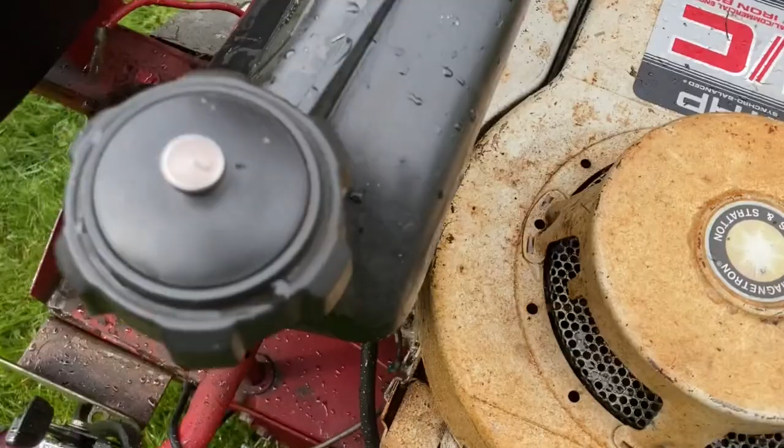Okay, well, it's cleaned up pretty good. Got a lot of grease and oil off. Up underneath here, not too bad. Not perfect, but that's fine. Makes it a lot easier to work on.

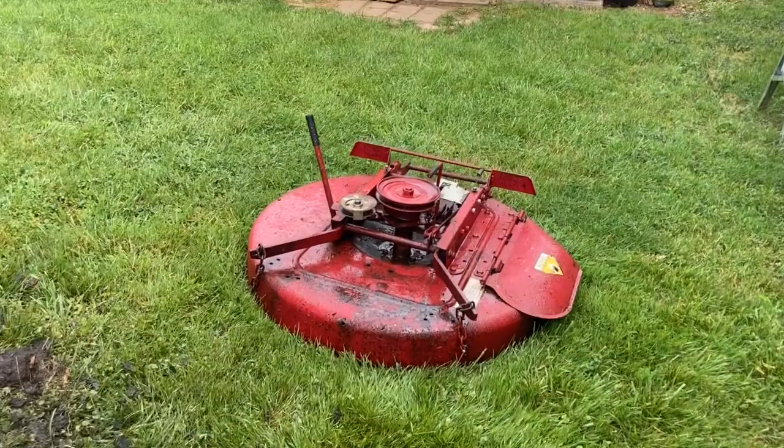Didn't hit the front too hard. I didn't want to lose the stickers. So, the deck could have come out a little bit better, but most of that's just missing paint, I believe. We could scrub it too if we want to.

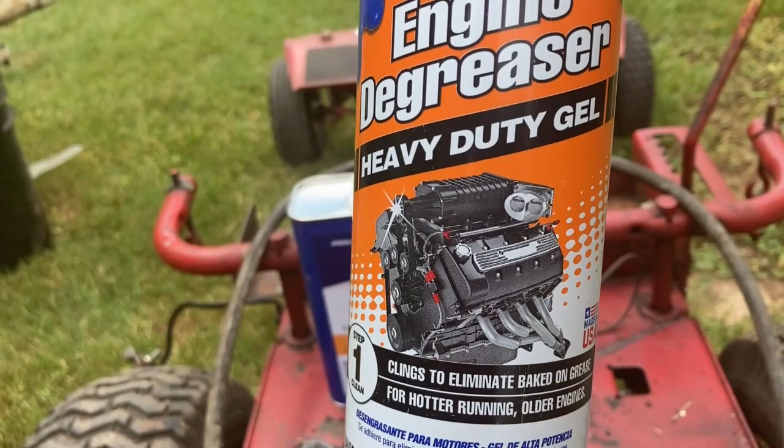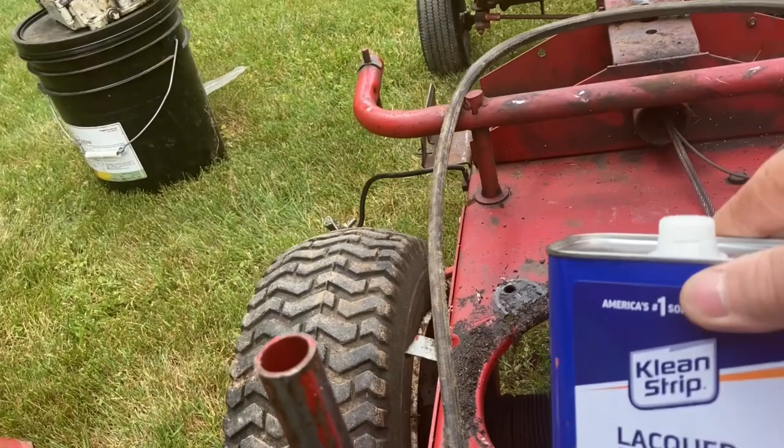I got this Gunk heavy duty gel to spray the engine in here on the tractor itself in the harder areas. And then after we get everything washed down, before I paint it, I want to use some lacquer thinner and just kind of go over, degrease everything really good so the paint sticks. I'll probably run some real light sandpaper over it just to make sure it's good, but it'll probably stick either way. This is pretty old paint.

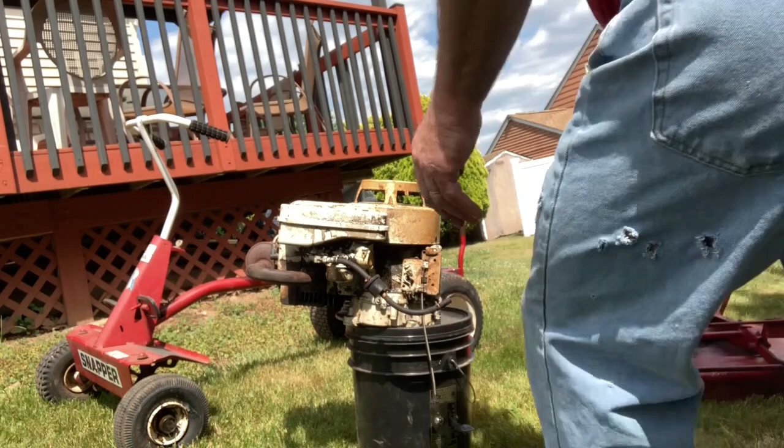All right. Yeah. Not too bad.

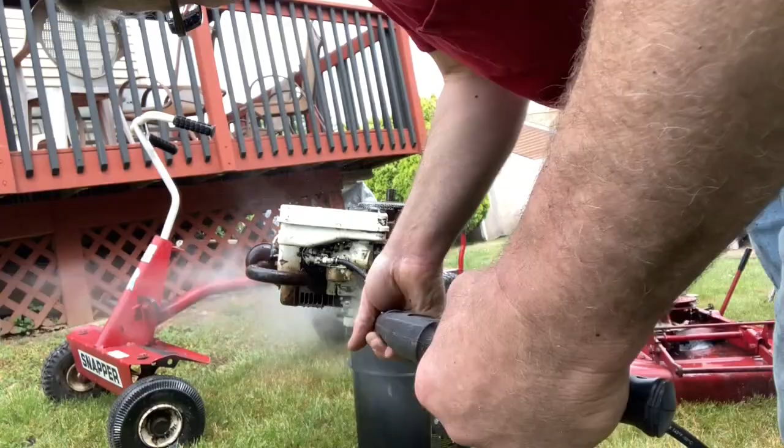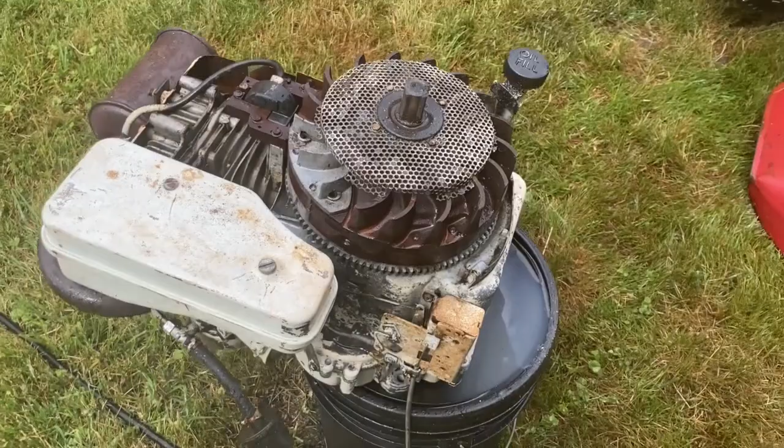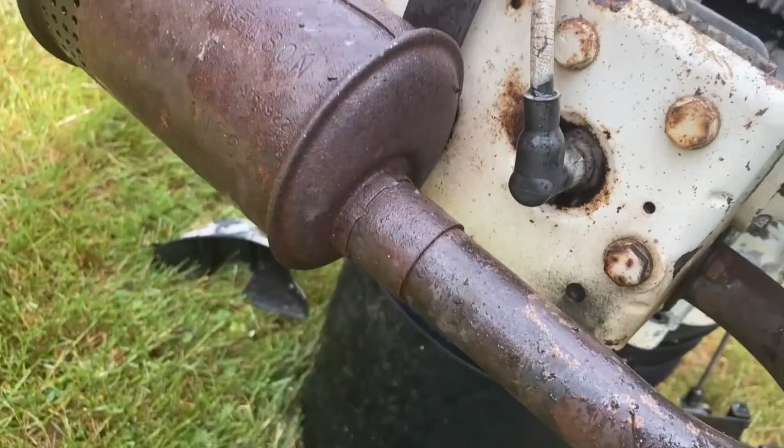That's about as good as we're going to get her with the pressure washer. The rest is going to be probably the engine. I'm just going to spray it down real good with brake clean, let it dry so I get a good paint on it. But it looks pretty good. Got most of the heavy grease off.

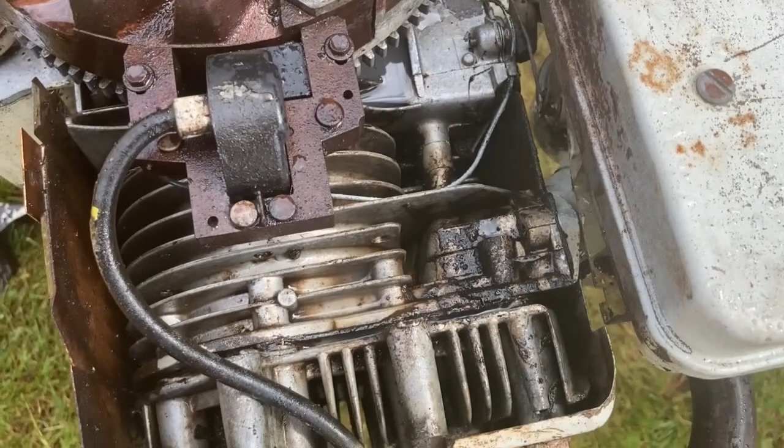Weren't very many mouse houses in there, not actually any in here, but I expected to see a few. But we got all the dirt out of there. Deck is a little bit cleaner. The rest is going to have to be done by hand with sandpaper and just some lacquer thinner. Got her pretty good under here. We're not going to paint under here, but I wanted to clean it up.

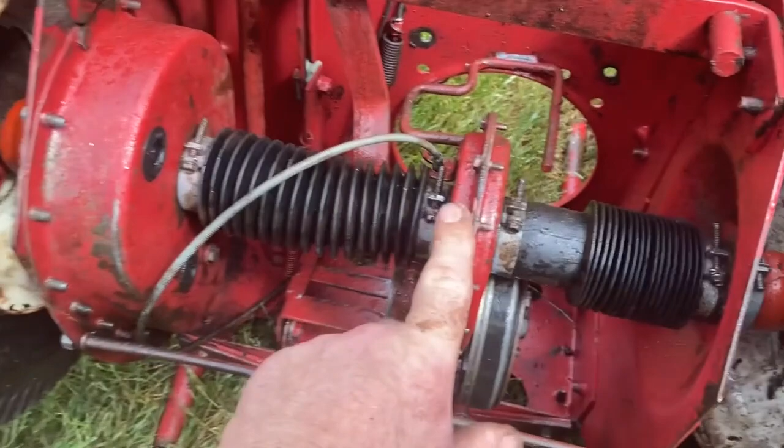Number one, I still got to look at what's going on with this brake. I'm not sure about that, so when we get into painting it and all that, before I do it, I'm going to probably take a look at that. I got a little bit of a parts list ready to go, I'll show you that in a second, and then whatever else I need for that brake inside here. I want to grease everything up, any zerk fittings like here that I need to hit grease on in the wheels. I'm not going to do anything here, and I'm not sure if I'm going to open up the chain case yet. I don't hear it rattling.

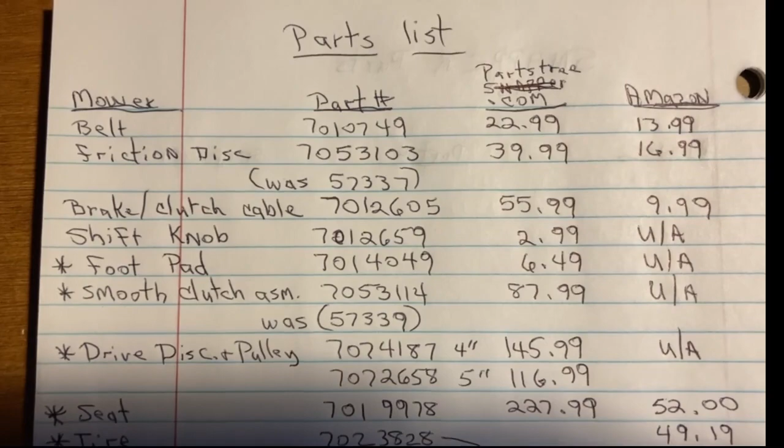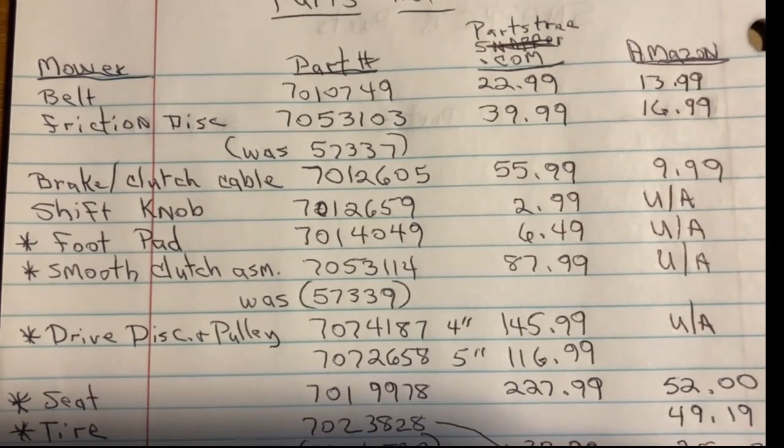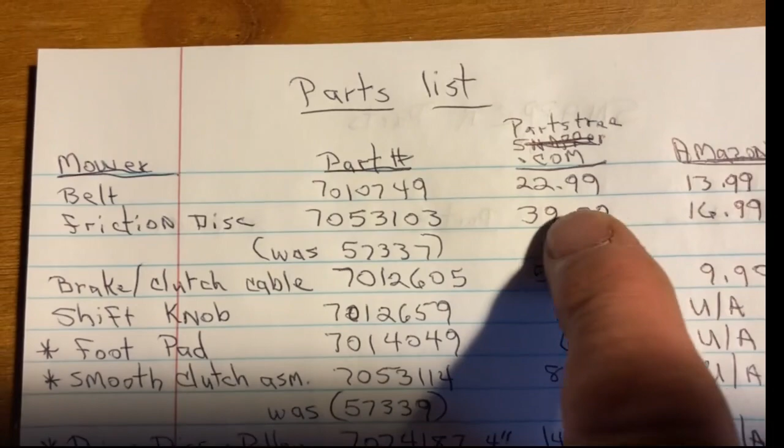I hope you can see this pretty good on the video. I made a parts list. The asterisks are parts that I looked up just to get an idea what they cost. I looked up the part number on Partstree.com, and I wrote down their price. That's the part number, which I believe is actually the Snapper part number.

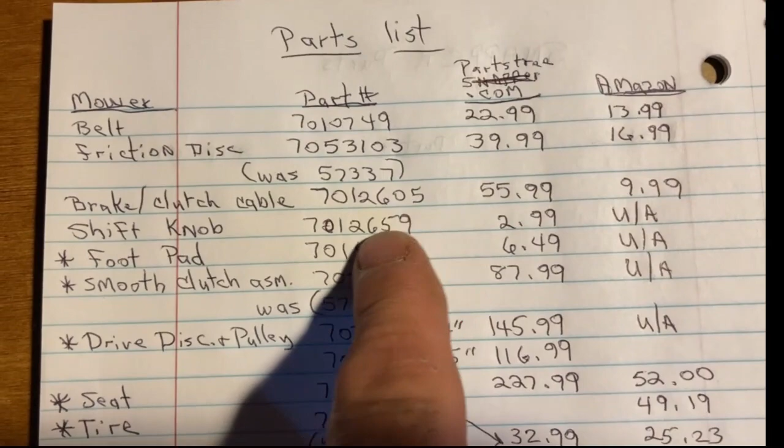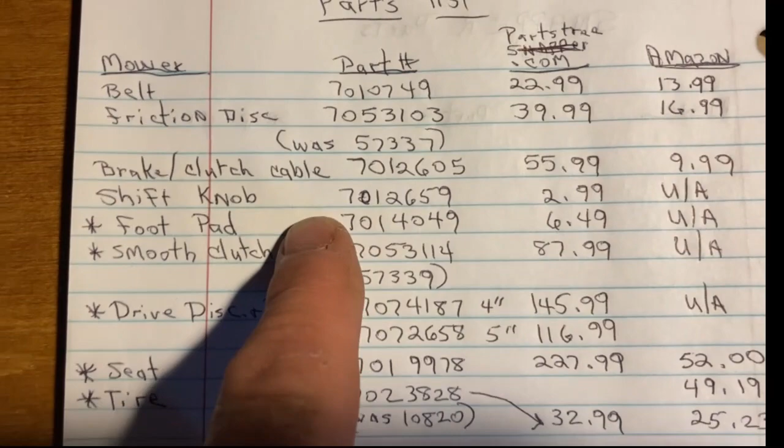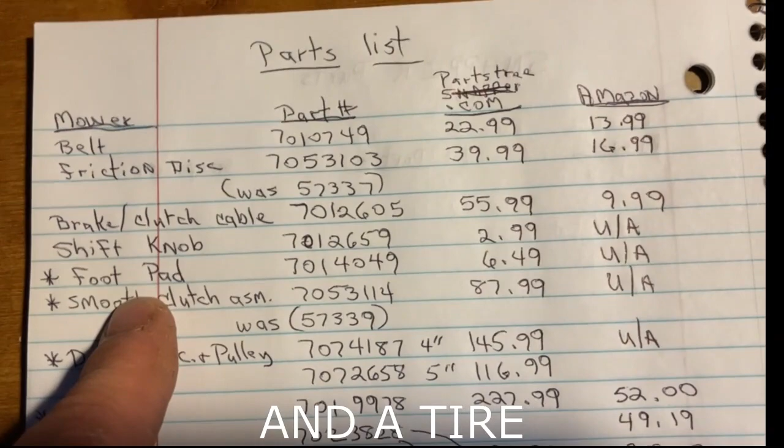The brake clutch cable I needed to order because my cable was going bad. I actually think I might have ordered the wrong cable, but you can see the difference in the part prices. The shift knob, I did see I can get, but I did not order that. I have the belt, the friction disc, the brake clutch cable—they're all ordered. I'm waiting on them. I need engine parts. These are the engine parts I need.

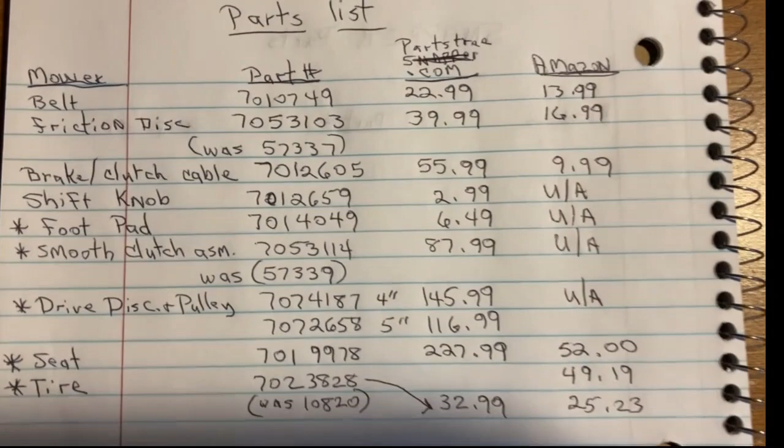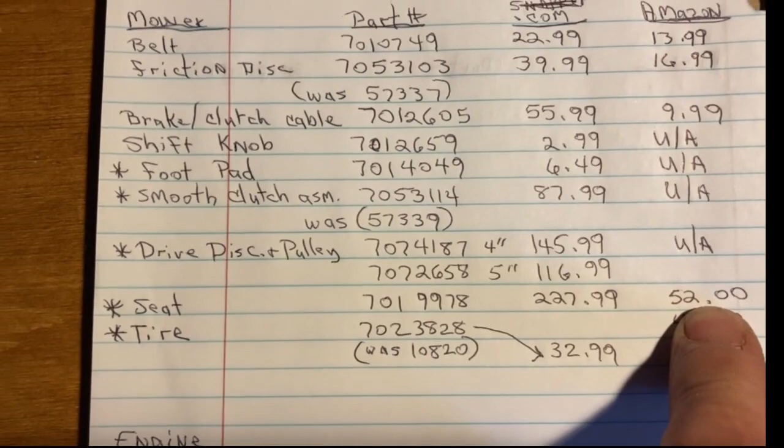Fuel filter, air filter, plug, just a basic tune-up and some oil. The asterisks are, out of curiosity, I looked them up and compared prices. If you look at the seat, it's $227 for the seat that says Snapper. This is an aftermarket seat on Amazon. I'm just going to tape my seat up instead, it'll look pretty decent when I'm done.

So today we're going to just get her cleaned up, degreased, scuffed up a little bit so the paint sticks, tape off any stickers, and pull the wheels.

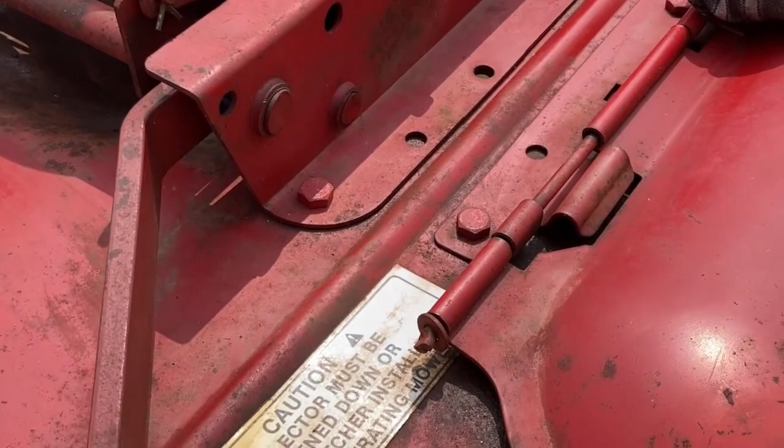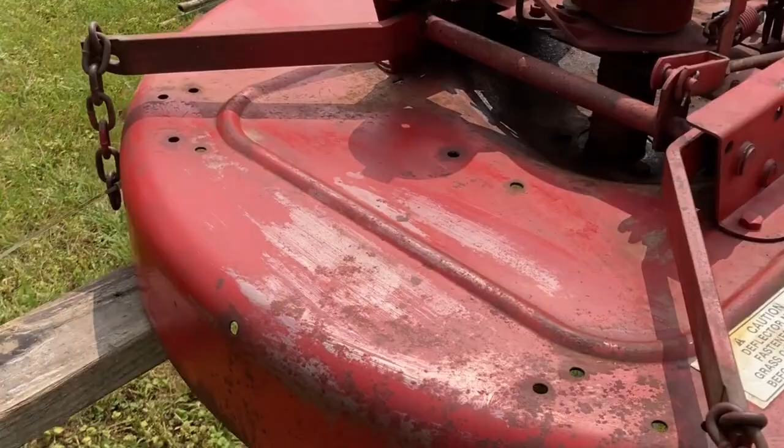What we're using today to degrease this is some lacquer thinner. In the heavier spots I'm using a Scotch-Brite sponge, but you got to be careful with that because the lacquer thinner is taking off the paint. It's probably lacquer paint, I'm not sure what they painted them with back then, but probably lacquer for that era. So that's what we got to do. Mostly I'm wiping it down with a rag soaked with lacquer thinner, and it's going to also help etch the paint so the new paint sticks.

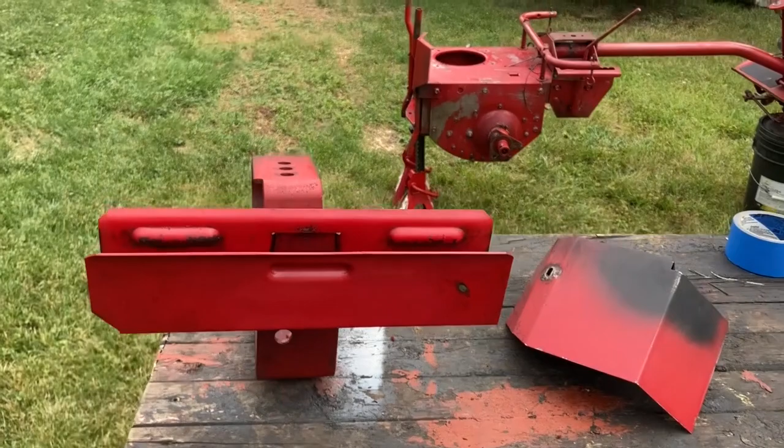Okay, we got everything torn down, cleaned up, sanded where we need it to be sanded. Not too worried about in here because there's a cover going over it, so I'm not real worried about that. But we're cleaned up pretty good, ready to tape off all the stickers.

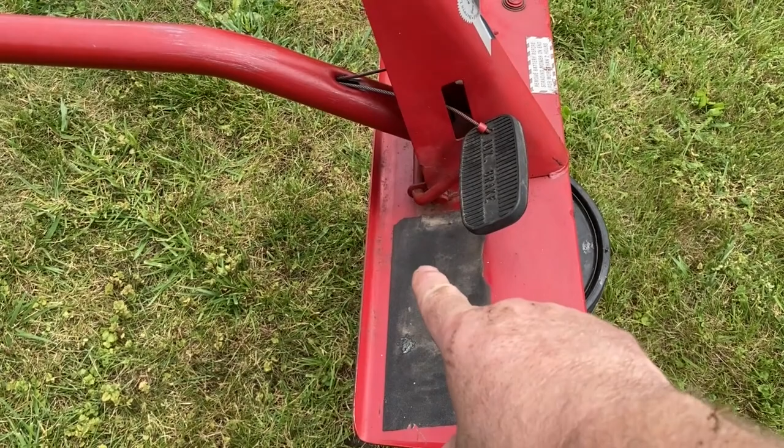I want to preserve as many of the stickers as I can. Some of them are already peeling, so we're going to tape them off. I could get them in the parts if you saw them in the parts list, but I just don't want to spend the money for them. I think I can get some slip padding from Home Depot or Lowe's instead, so I don't want to spend the money on that. Unfortunately I couldn't save the sticker we had here, but that's okay.

Okay guys, there it is, after the frame and all that's been painted. Still haven't done the wheels and the motor, that'll come next, but here's the pre-assembly.

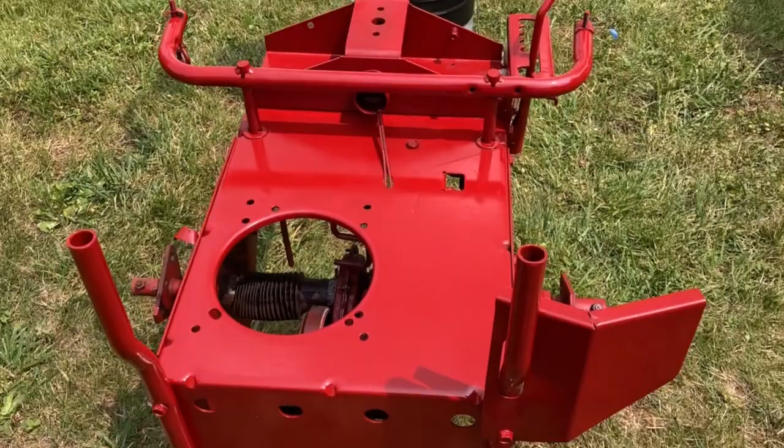Came out pretty good, I think it was a good color to choose. I think it matched the original pretty well. It was Regal Red that we used, Rust-Oleum, but it looks pretty good.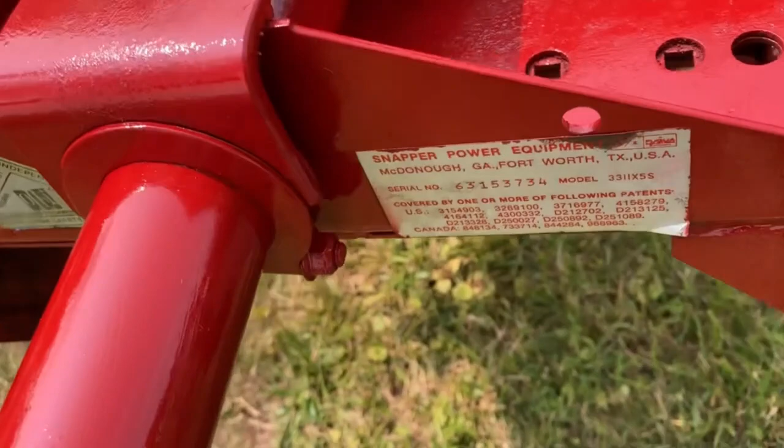I'm a little concerned there, I'm losing my nameplate here, but not too bad.

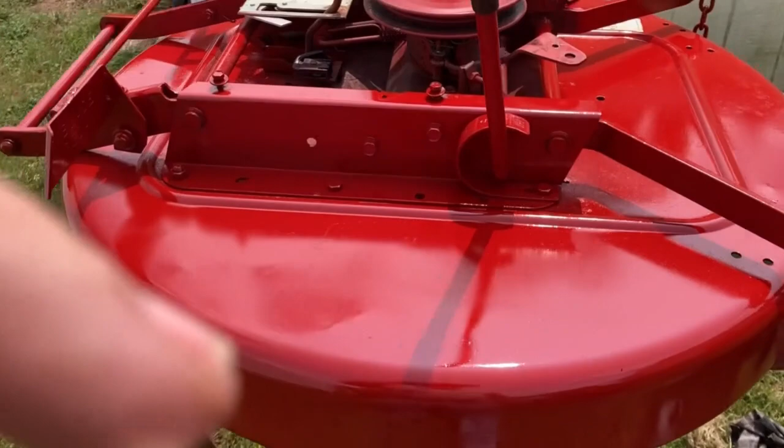Yeah, I like it. Come over here to the deck. The deck's looking pretty good. It's hard to see this on camera because of the sun, but yeah, not bad.

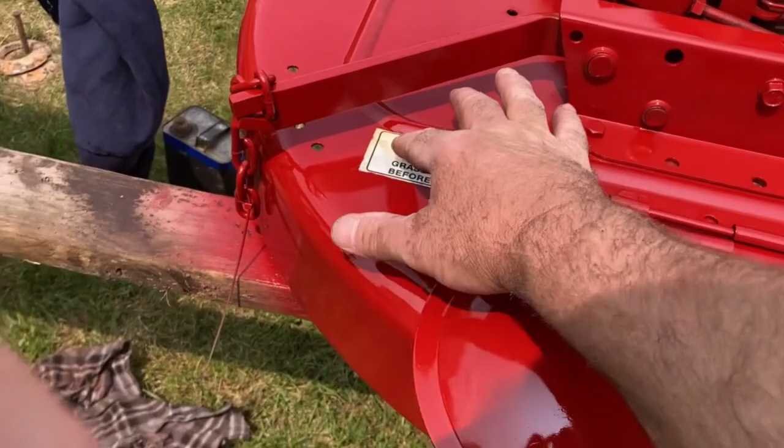I'm not too worried about down in here because this is all going to be covered over with a cover. Preserved as many stickers as I could. That one I'm going to lose eventually, it's peeling up, but it looks good. I think I got a little bit of a run on here, but that's fine, we'll just charge extra for that.

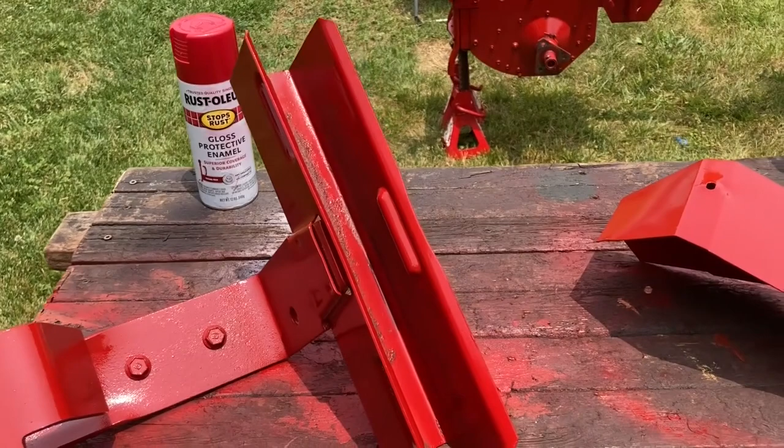I'm going to let this sit and dry and get started on the wheels in a little bit. I forgot to show you that I actually managed to save the extra tough and Hi-Vac stickers too. However, the anniversary sticker from the shop that sold it, I could not save, but that's all right.

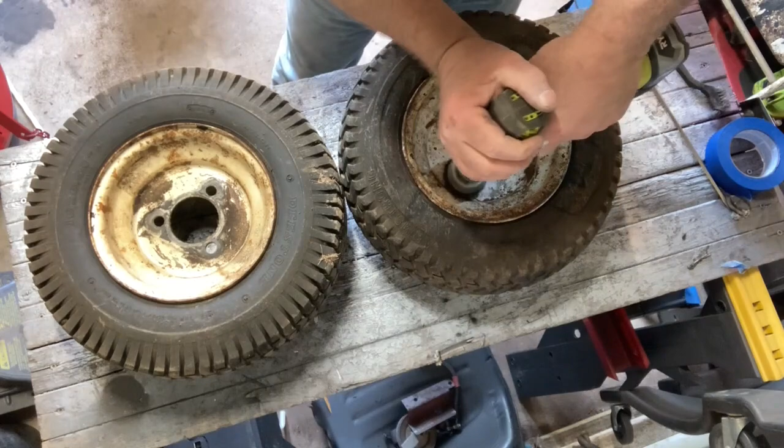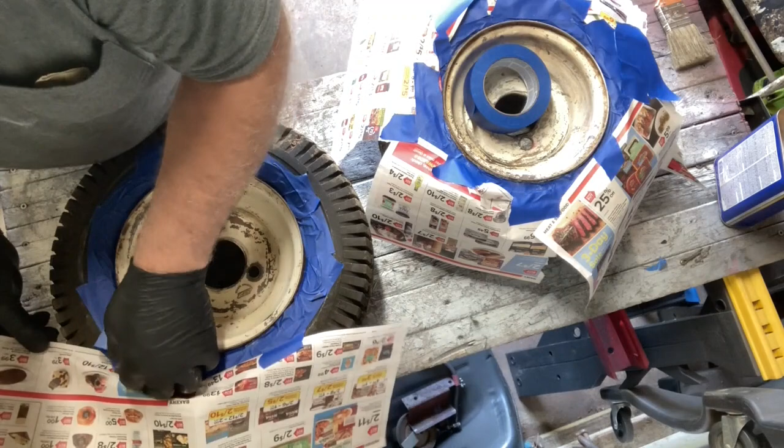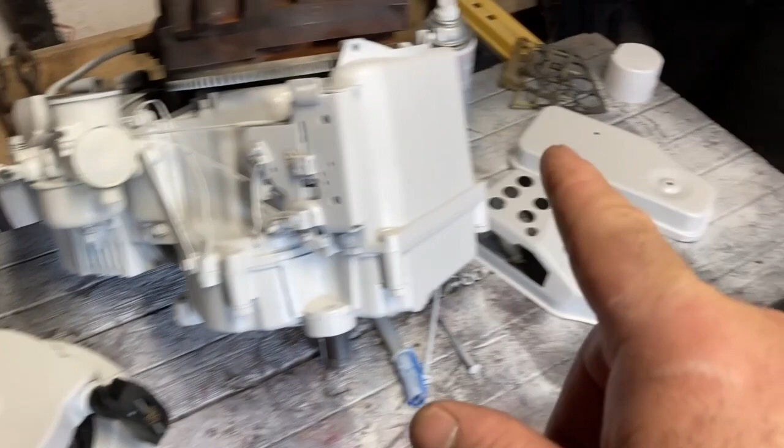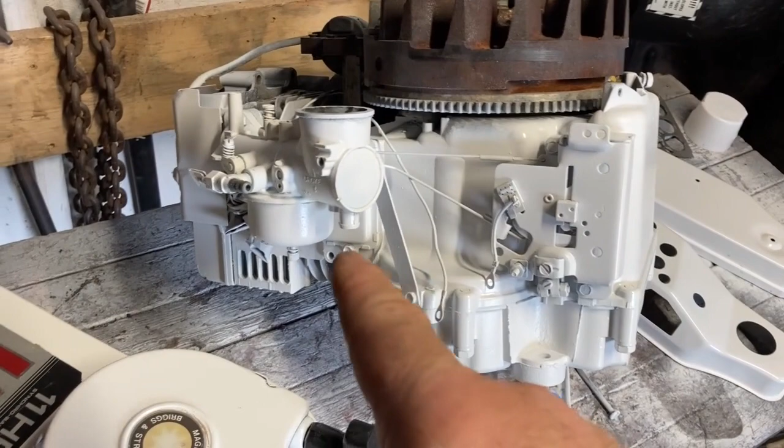Okay, we got our engine all painted up. I did the shroud with the pure white, and the air filter was done with the pure white too. But I did the engine block with the high heat white, and I sprayed a little of the pure white over top of it just to get a little bit of gloss, because the high heat was kind of a matte finish.

So, but yeah, that's looking like she's ready to go back together, and we're getting close. As soon as I get some parts in, I can start assembling things and get this together.